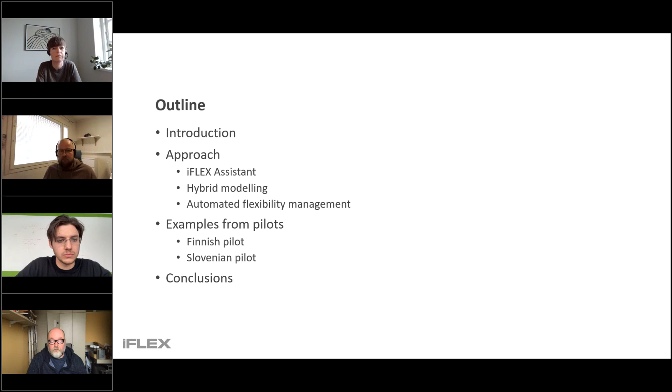So here's the outline for the webinar presentation. I will first give you a short introduction to the topic, explain a bit more in detail the iFLEX Assistant concept and our key ideas and approach for the hybrid modeling and automated flexibility management. Then, like Luis said, we will dive a bit more in detail with the pilots and what type of approaches we have applied there. I will present the Finnish pilot, and then Davor the results and approaches from the Slovenian pilot. And of course, in the end, we will provide some conclusions.

So we all know that demand flexibility is becoming more and more important for the power system balance. And this is because as we replace traditional fossil fuel-based power plants with renewables, we kind of lose controllability that then needs to be compensated with demand flexibility. Two of the most potential assets for flexibility management are heating systems or HVAC systems in general, and then EV charging. And in our work, we have mainly focused on the heating systems.

Heating systems have a lot of potential, and actually they are the most potential technology in the near future, according to a recent study by DNV. And this is because heating systems use a lot of energy, and buildings also have a large thermal mass that can be used to store energy and this way move the consumption within a day. For example, to periods when there's a lot of renewable production available.

Of course, electrification of the heating systems needs to happen before the flexibility is available for power system balancing at a large scale. But this is actually now happening quite rapidly in the EU, and there's a plan for 10 million new heat pumps in the next 3 years.

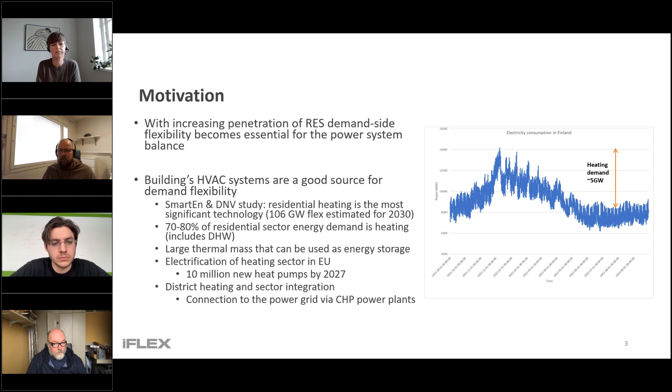So these electric heating systems, both direct and then of course heat pumps, are popular outside of cities in Finland. In cities we mainly have district heating, but because of combined heat and power plants, it's also possible to use the heating systems supplied by district heating to provide flexibility for the power system. And in the later part of the presentation, I will show some results in the case of the Finnish pilot, where we actually have a hybrid heating system that is both supplied by district heating and an exhaust air heat pump.

There are of course several challenges that need to be solved before demand flexibility from buildings and heating systems can be used for power system balance at a large scale. The first challenge is that the demand side assets need to be very predictable. So we need to be able to forecast the baseline and flexibility, of course, including all rebound effects that will occur when we take the flexibility into use. And this is important if we want to use demand flexibility as a key balancing asset in the power system.

Another challenge is the controller design. And this is a challenge because HVAC systems are complex. There are long feedback cycles and many times nonlinear dynamics. And now the controller, in addition to this traditional thermal comfort, should also take into account the dynamic prices, local production from renewables, coefficients of performance, maybe power tariffs. It needs to take different things into account, and we believe that the model-based approach, model predictive control, will be needed to realize this in an optimal way.

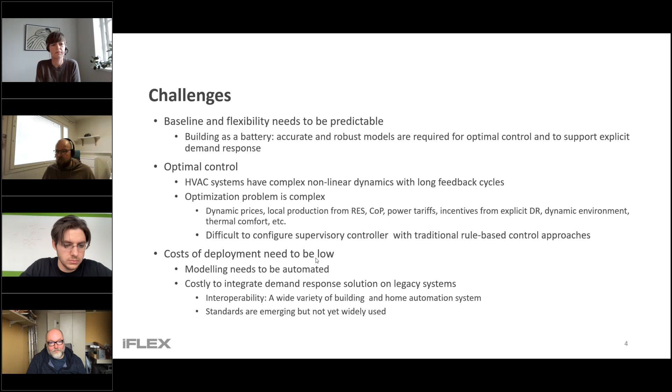So like Luis already explained, the iFLEX Assistant is the key concept of the project. It's a software agent that automates flexibility management in buildings and in consumer premises to maximize the consumer benefits. Typically, this means reducing the costs and maybe reducing the CO2 emissions while keeping the thermal comfort and other preferences in check. The iFLEX Assistant has 3 main functions.

The first function is, of course, to ensure that the flexible assets like heating systems and EV charging are operated according to the consumer preferences. The second function is to provide aggregators and in some cases utilities with forecasts on the baseline load and flexibility. And third, the iFLEX Assistant is responsible for controlling flexible assets to maximize consumer benefits while taking into account dynamic prices, incentives, and explicit control signals from aggregators.

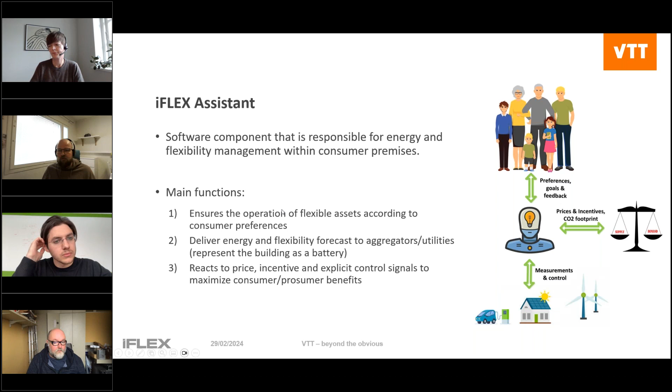In this slide, I try to highlight the main ideas and approach for automated flexibility management and optimal control. The key idea highlighted here is that we use hybrid modeling. So we try to combine the best parts of machine learning and physics-based modeling to create models that are accurate and robust, but also easily replicable to new buildings and sites.

And these models that we create with this hybrid modeling form what we call a digital twin of the consumer. And the automated decision-making algorithms, model predictive control algorithms, use these models to find the best control policy for, let's say, heating systems or EV charging in any given situation. And like I said, we use model predictive control, which means that the optimal control algorithm optimizes the set points for different devices and control points in a sliding window. And new optimization is performed at every time step. In our pilots, we have used mainly 60-minute and 15-minute time steps for the model predictive control.

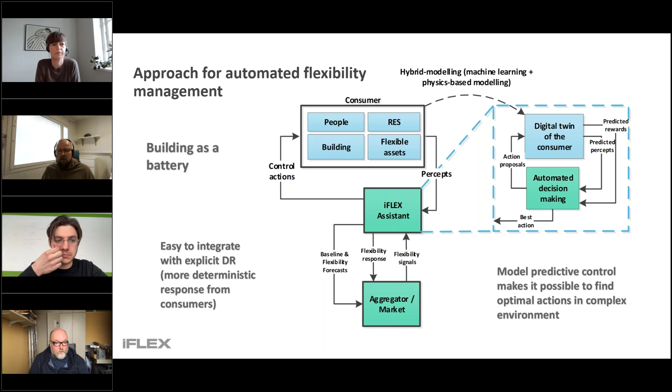Okay, so like I said, our hypothesis is that by combining the best parts of machine learning and physics-based modeling, we can create models that can adapt to data and provide state-of-the-art results. But also the models need to work in situations that are not covered in the training set. And it's also important that the model creation is automated. So our approach there is to apply automated machine learning together with physics-based modeling to automate the model creation process.

It is still kind of an open research question what's the best way to combine machine learning and physics. What's the best way to create this hybrid model? And here I have listed some approaches for hybrid modeling that we have studied in the project. We will not go into details with all of these, but we will describe the bolded approaches briefly in the context of Finnish and Slovenian pilots.

The gray box modeling here is a typical approach to represent building heating dynamics as a kind of circuit theory model, which consists of resistive and capacitive components. Our new approach in this project, that Davor will present in the context of the Slovenian pilot, is that the gray box model is implemented as a neural differential equation. Neural differential equations are a quite new model type, which allows differential equations to be embedded into a neural network, and this has many advantages.

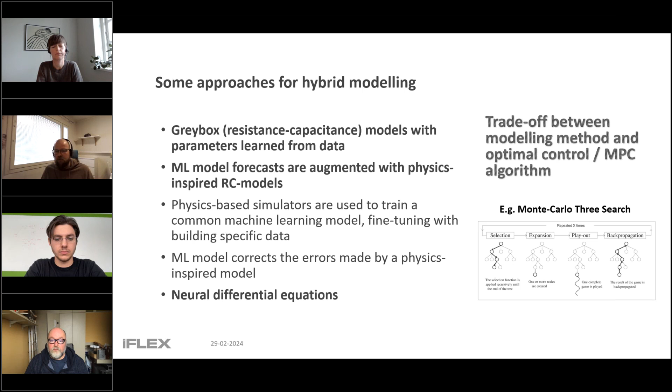But with these other approaches, we typically have to rely on simulation or search-based optimization methods, like the Monte Carlo tree search, for example. So there is a kind of trade-off whether you choose a simple linear model and then an optimal control algorithm that can be proven to be optimal, or whether you go for a more accurate, more detailed model, but then you have to rely on more heuristic-based, non-optimal control algorithms. And this is also an open research question, which of the approaches will actually provide the best results in practice.

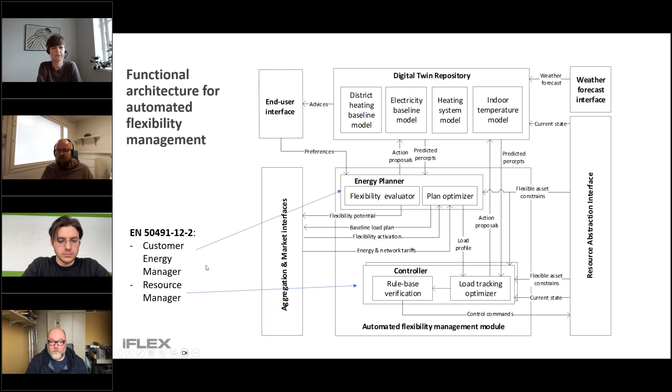In addition to the energy planner, we also have controllers, and there is a single controller for each flexible asset. So for example, we could have a controller for the heating system and then another for EV charging. The role of the controller is to follow the flexible asset specific load profiles provided by the energy planner. And if you are familiar with the ongoing European and international standardization, we can map the energy planner and controller to these entities. The energy planner is very similar to the customer energy manager, and the controller to the resource manager entities in the standard.

Okay, let's then jump directly to the Finnish pilot and a bit more concretely the approach there. In the Finnish pilot, we actually have two bigger buildings, an apartment building depicted here and a supermarket. But in this presentation, I will just focus on the apartment building iFLEX Assistant. The main flexible asset of the building is the heating system. It's a hybrid heating system that is supplied both by district heating and an exhaust air heat pump. We collect a wide variety of data from the building automation system and are able to adjust the set points for two different control points.

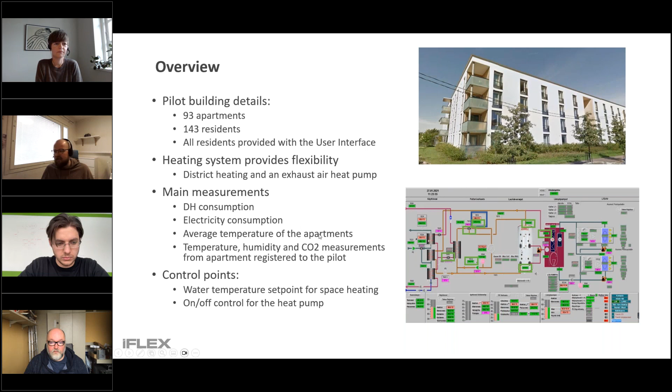Additionally, as part of the Finnish pilot, we organized a common pilot with the OneNet project, where we demonstrated how the flexibility from the pilot building together with a large number of virtual sites can be used for solving bottleneck issues in the TSO and DSO networks. And this common demonstration with OneNet was implemented together with Fingrid, which is a Finnish TSO, Kymenlaakson Sähkö, which is a DSO, and then Nord Pool, of course, in addition to the iFLEX partners.

And we have the iFLEX Assistant integrated with Caverion's automation system through a gateway. The connection to Enerim's aggregation platform is implemented through MQTT. The iFLEX Assistant provides the aggregation platform with baseline and flexibility forecasts, which were used to make bids in the Nord Pool intraday market.

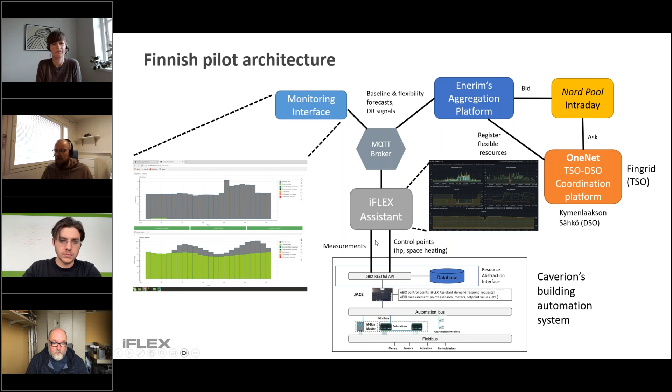As you can see here, we also have implemented a variety of monitoring tools to visualize the baselines, both for electricity and district heating, and also the flexibility available at different time periods. And also a tool to monitor the data that we collect from the building automation system.

We also have a simple physics-based model to model the impact on the indoor temperature when we constrain the heating, and this model is derived from Newton's law of cooling. It has two parameters: a thermal capacity for the whole building and a heat loss coefficient. And the heat loss coefficient we can identify from historical measurements using the energy signature method. I will explain this a bit more in detail in the next slide.

And then for the thermal capacity, we require control experiments for proper identification. So actually, when we started the pilot, we used initial values based on standard estimates that are calculated based on the floor area of the building.

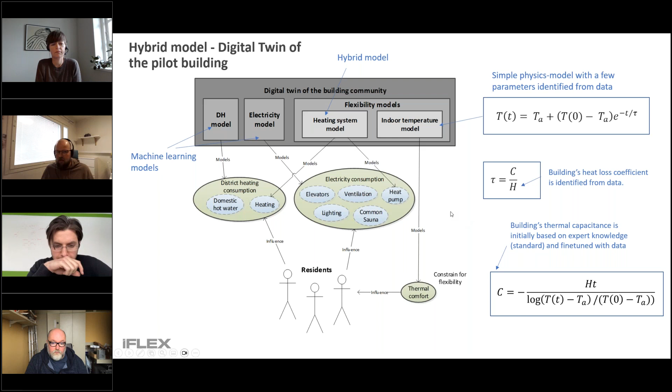And in this case, we identified the heat loss coefficient to be a bit over 4 kilowatts per Celsius. So this means that if the outdoor temperature drops by 1 degree, the heat demand on average increases by 4 kilowatts in the building. We had a bit of a small challenge in automating this process because with the data we had, there were some issues.

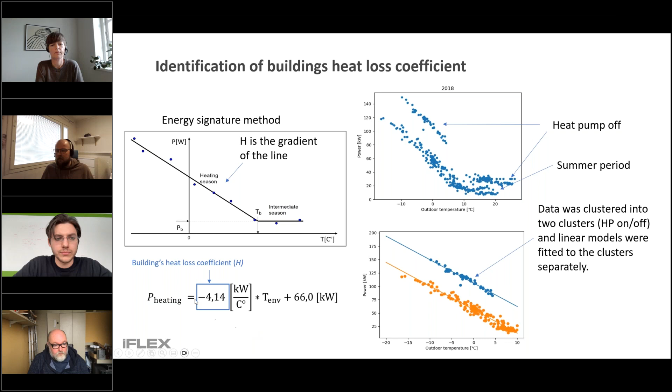So yeah, we were able to identify the heating demand as a function of outdoor temperature, and then the heat loss coefficient, which is required in the indoor temperature model. This heating demand is part of the hybrid model of the building.

Then for the thermal capacity, we actually calculated an initial estimate based on standard values and came up with, based on the floor area, 720 kilowatt hours per Celsius or Kelvin, and then to correct this value based on data, during the pilot we also organized control and demand response testing and used these results to have better estimates for the capacity.

And the capacity was then calculated using this equation. This is also derived from Newton's law of cooling. And we assume here that there's no heat going into the heating system. And then as we know the H, we need to measure the outdoor temperature and then the change in the indoor temperature. And then we can calculate the thermal capacity. And based on the data,

we calculated the thermal capacity of the building to be roughly 430 kilowatt hours per Celsius or Kelvin. So it means that if the demand is roughly 100 kilowatts, you can fully turn off the heating for a bit over 4 hours. And in this period, the indoor temperature only drops 1 Celsius. If you allow the indoor temperature to drop 2 Celsius degrees, then the flexibility is double the capacity here.

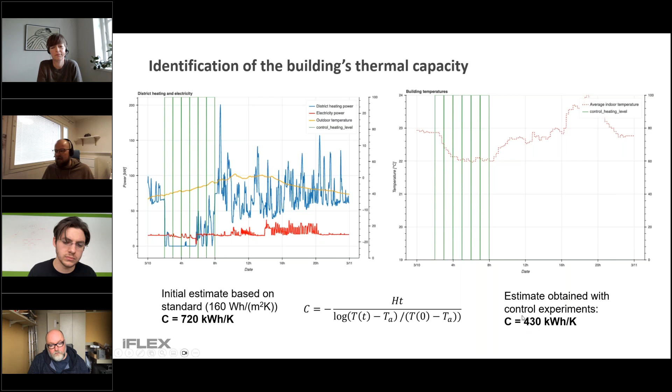Yes, like I said in the motivation part, it's important that the iFLEX Assistant is able to provide the aggregators and also utilities with accurate and robust baseline and flexibility forecasts. During the last 2 winters, we have executed more than 50 demand response events, both to constrain the space heating and also the heat pump directly. And we have measured the accuracy of the forecasts provided by the iFLEX Assistant.

In our pilot, the forecast length was 24 hours. So we mainly targeted the intraday market, and the iFLEX Assistant provided a new forecast every 60 minutes. And also when we activated the flexibility, a new forecast was also immediately calculated.

And we calculated the errors using root mean square error, and for district heating, the error was a bit below 8%, or roughly 8%, when normalized with respect to the variation, so minimum and maximum values. And for electricity, the accuracy was roughly 6%.

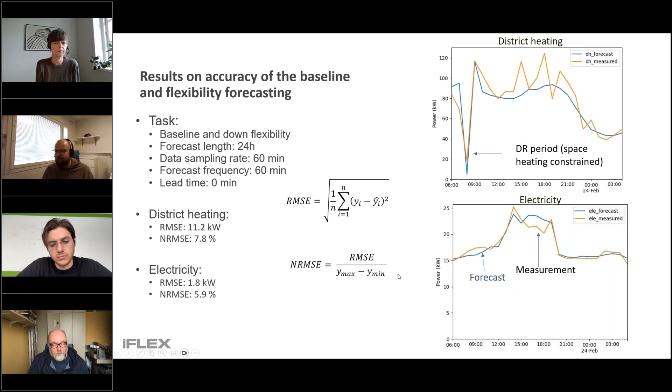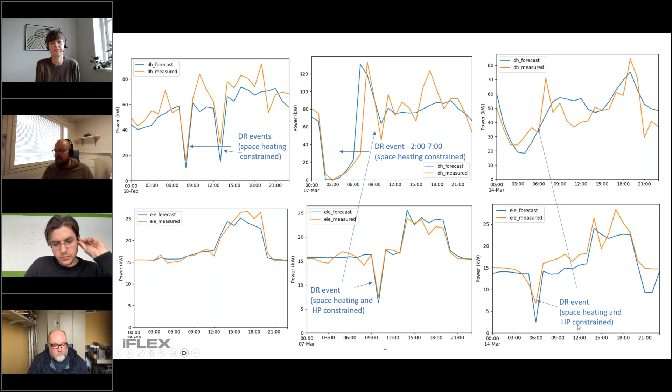And in the last figure, we selected the period where the DR event forecast had a bit larger error compared to a typical situation, and it seems this is mainly because of the errors in the baseline forecast. So here there's one event that slightly affects the district heating, but mainly the heat pump, or actually the total electricity consumption. So here we constrain both the space heating and the heat pump.

Okay, then the final slide from my part. In addition to this explicit demand response and offering the flexibility to Enerim's aggregator platform, and from there the intraday market or test market, we also did some local optimization. The pilot building did not have a spot price contract, so we were a bit restricted in what we can do. But in any case, the iFLEX Assistant was configured to reduce the energy consumption by using the flexibility, so that it tries to keep the indoor temperature as close as possible to the minimum values or the set point values. We performed the optimizations every other day, mainly during the night, morning and midday, so that we don't impact the reference period results.

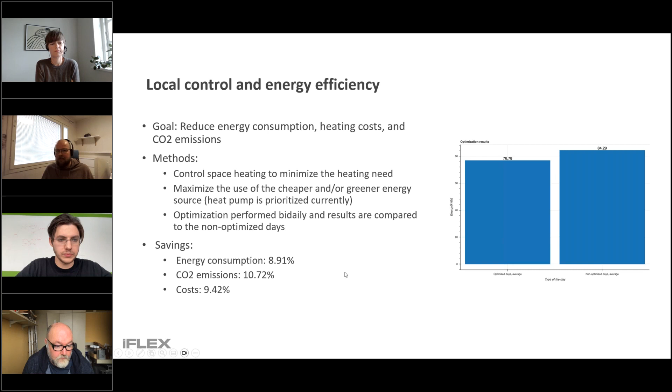And you can see here that we were able to reduce the costs and CO2 emissions roughly 9 to 10% during the test period. And this test period was organized over several months during the last winter. Okay, that was the Finnish pilot in short, and how we have applied the approaches there.

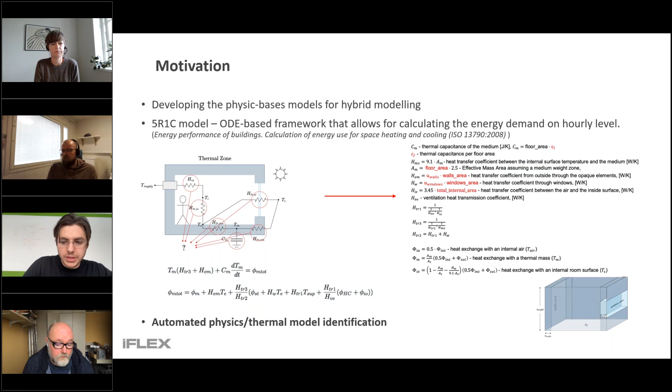The approach that we're developing on thermal model identification is based on the neural differential equation algorithm. It is a powerful algorithm that combines differential equations and neural networks and is capable of learning the dynamics of the system based on the system's observations and the forward and backward paths.

To utilize the algorithm, we have adjusted the original ODE, the 5R1C ODE for thermal mass. We have adjusted it for the inside air temperature and constrained ourselves only to a nighttime case, for which certain variables that are very hard to measure converge to zero, and other variables are very easy to approximate. So the basic idea here is to observe the temperatures for the defined nighttime case, model the derived ODE with the neural network, and infer its parameters by fitting the neural ODE.

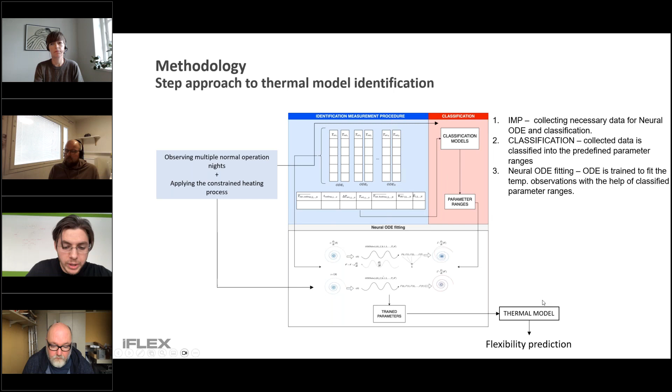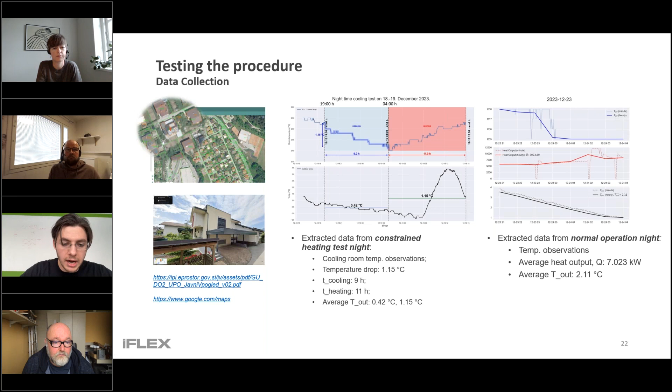Besides that, we have also applied a so-called constrained heating process, where we constrain the heating for a certain period and then heat the household back up. This process of cooling down the household and then heating back up allows us to collect certain data such as the temperature observations, temperature drop, time cooling, time heating, and average outside temperatures. And this data is very rich for explaining the thermal behavior of the household.

Once we have collected the data, we use the data, as I said, in the classification step. We classify the parameter ranges, and we fit different nights with the neural ODE algorithm. And here we present some initial results on the first trainings. As you can see on the table at the top, here we can see the relative error for the trained parameters. We can see that the relative error varies from 1% to 20%.

One remark I should make here is that the thermal model is not equally sensitive to every parameter. So this is not the most important thing that we should look at when we obtain the parameters and when we want to further validate the accuracy of our model.

To proceed further to the validation of our model, we have compared the total heat consumption and the average heat power for different months. And here we can see that the relative error for the trained parameters varies from roughly 11 to 21. We use the trained parameters for the thermal model, and then use the thermal model prediction to evaluate the trained parameters.

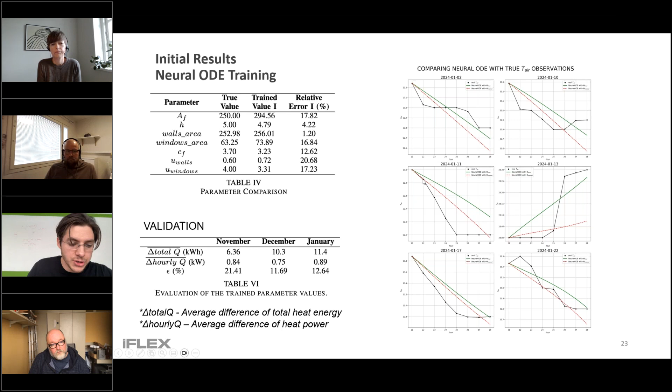Now, once we have the trained parameters, we can proceed to the flexibility predictions. For this, we have performed both nighttime and daytime flexibility tests, which include applying certain processes on the household and then comparing the electricity and heat consumption of such processes with the baseline prediction from the model. It is important to note here that these processes that we apply do not violate the temperature comfort, which is defined and specified by the household tenants.

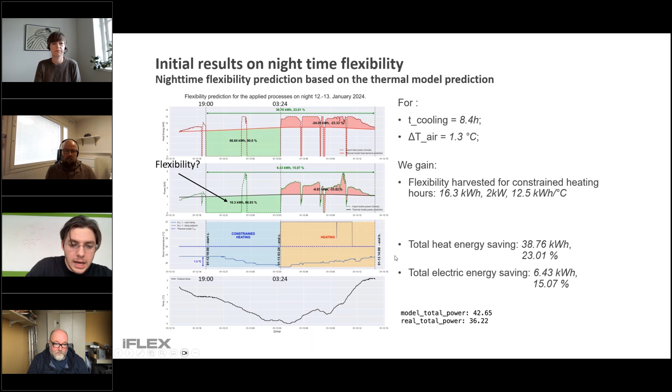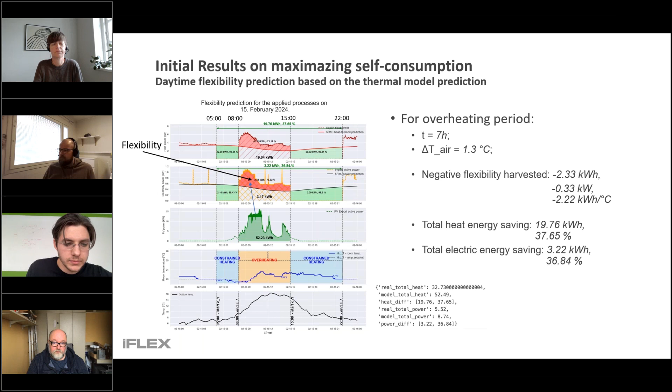Okay, let's then move to the conclusions. So to summarize, heating systems, HVAC systems in general, are a good asset for demand flexibility, because of the high energy demand and natural thermal mass in the buildings. And like we presented, it's important to have accurate and robust forecasts, both for baseline and flexibility available, so that the aggregators and utilities know what will happen when the flexibility is used. Flexibility management needs to be highly predictable if we plan to use demand response or demand side flexibility management as the core asset in power system balancing.

As we have shown, a good approach for HVAC system modeling is to combine the best parts of machine learning and physics-based modeling and apply this hybrid modeling. And we have shown good initial results, and how the hybrid modeling can be done, also some results from the optimization side, but it's still an open research question what is actually the best way for hybrid modeling, especially when we take into account the optimal controller design, as like we discussed, they depend on each other.